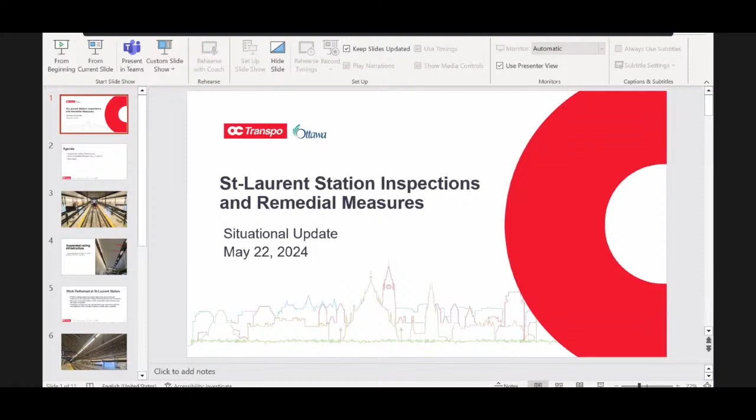I'm happy to share that Saint Laurent Station has fully reopened for customers as of the start of service this morning. Train Line 1 service started on time, running from Tunney's Pasture to Blair Station, serving every platform. I would like to thank our customers for their patience over the last few days with this inconvenience. As you will see in the presentation, this was complex work affecting a large area of the station that could not be rushed. I'm thankful to Tammy Rose for joining me today.

Her team has been working nonstop with our transit engineering team to get us to where we are today. I know many of you have questions about Saint Laurent station, and we have experts with us, in addition to Tammy and myself, to provide you with as much information as possible. This afternoon, we will cover what led us to temporarily close the train platforms at Saint Laurent station, the work that has been completed, and next steps. Next slide, please.

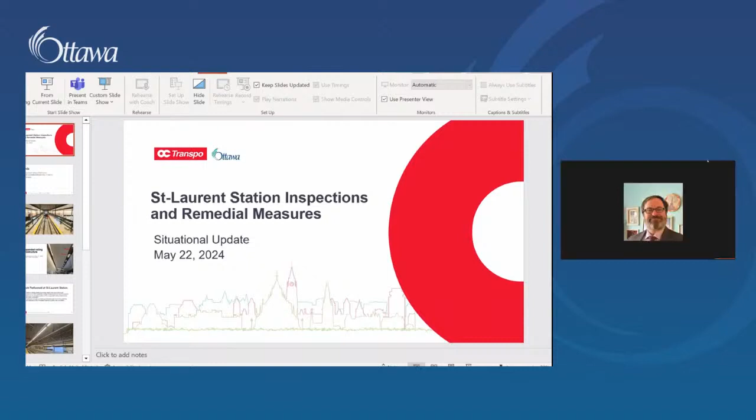René, excuse me, I don't want to interrupt you, but we're not in presentation mode. Is the media on the line? One second, Tammy, we'll get that fixed. Thank you, Tammy. I think we're good to continue, René. We're seeing the photo of Saint Laurent Station now.

Excellent, thank you very much. My apologies for that. So I will now speak to what led us to closing the train platforms.

Undertaking these daily inspections allows us to find and address potential issues before they become more serious or pose a safety risk. In this instance, while there was an impact to service at Saint Laurent Station, identifying this issue now has allowed us to quickly address it and work to put in place a long-term fix. Once this was discovered, out of an abundance of caution, we immediately took action and closed the train platforms to give crews the space to inspect the ceiling safely.

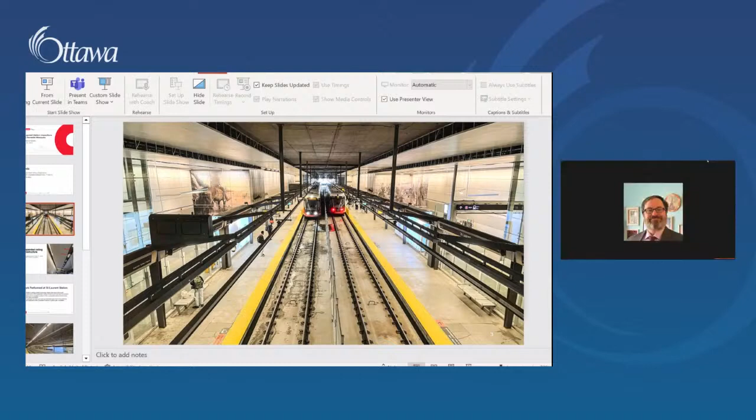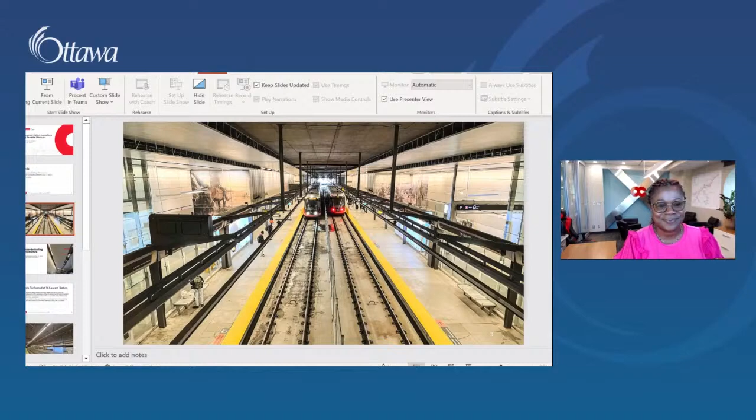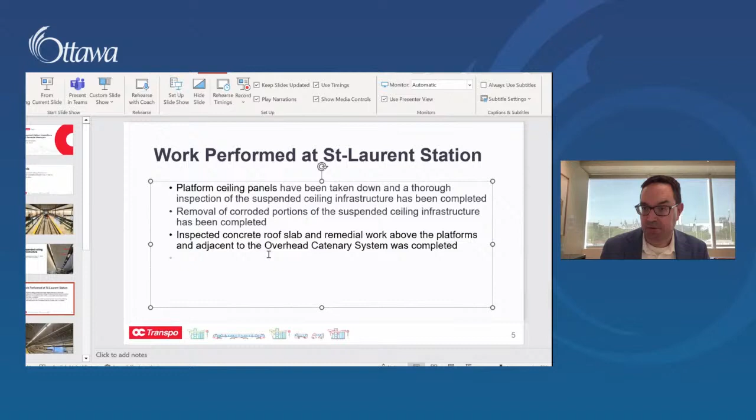René, I'm just going to pause you. I haven't seen the slides advanced. I'm not sure if anyone else has. I see a couple shaking heads. So we should be on slide 5 now, I believe. Chair, my apologies, the team is working on it, there's a small technical hiccup, if you give us just a second we'll have it fixed. Okay, we'll take a pause then for a few seconds. Thank you very much, because I don't see my slides. So we're on slide 5 now on the screen. Are we good to keep going? Yeah, I'm talking about slide 5 effectively. Okay, so maybe I can just say it again.

First, engineering teams removed some suspended ceiling tiles to do a preliminary inspection and make recommendations on next steps. It was then determined that to support a complete and detailed inspection, all suspended ceiling tiles on the platform area had to be removed. Once this was complete, workers removed corroded portions of the suspended ceiling structure and reinforced other sections.

This work posed an additional challenge as part of the area that needed to be worked on was adjacent to the overhead catenary system. This is why we needed to temporarily suspend Line 1 service late last evening and de-energize the system in that area. This provided us with the additional time required to complete the remaining work in areas close to the overhead catenary system and inspect the concrete roof slab, which allowed us to open for service this morning.

Once all work was complete, a final thorough inspection was done and sign-off was provided by the engineering teams. Next slide, please, we should be on slide 6.

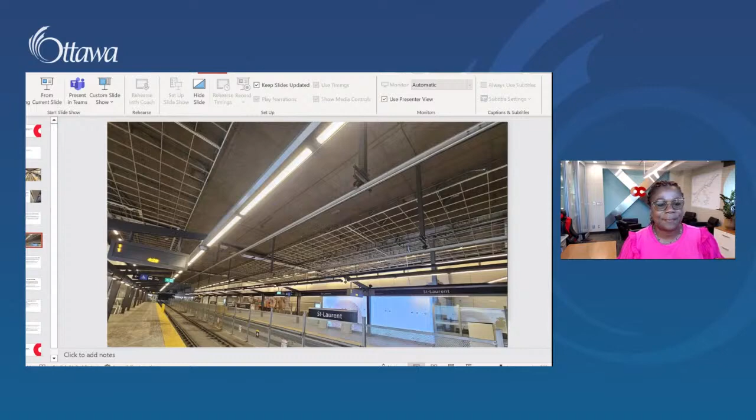Multiple engineering teams worked together, and the Infrastructure and Water Services Department provided engineering on the concrete roof slab. Then, Rideau Transit Maintenance provided their sign-off on the suspended ceiling infrastructure. Lastly, our transit engineer services confirmed that the station could reopen. After all of these validations were complete, the station was cleaned for customers and reopened this morning.

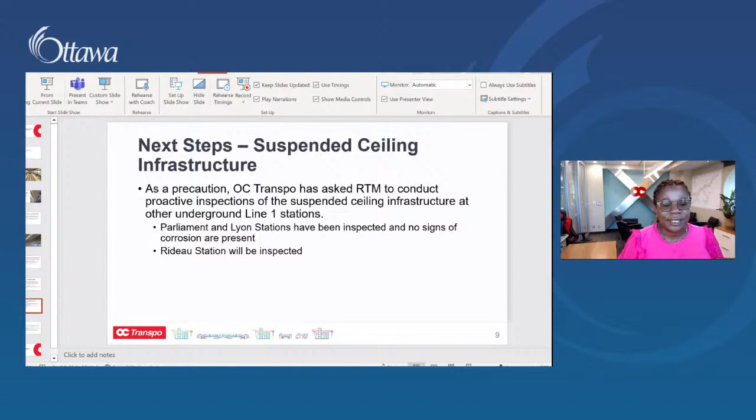We have provided a lot of information today, and I want to recap the important things to remember. The city has frequent, routine, and mandatory inspections of all municipal assets. RTM continues to undertake regular inspections of stations and rail infrastructure. The Infrastructure and Water Services Department has protocols in place for regular inspection of citywide assets, including the Saint Laurent Tunnel. Future inspections and our minor rehabilitation efforts in Saint Laurent Station will be coordinated to minimize impacts to customers.

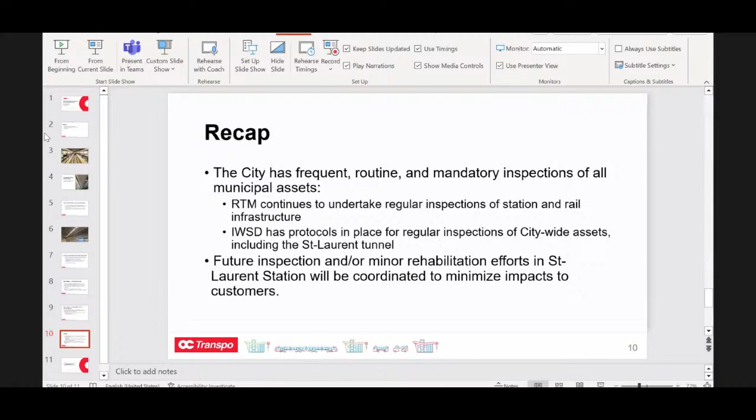This is some of the discoloration, which was the first indication. Maybe just, again, for people who are tuned in, can you explain what we're seeing here, what the arrows are indicating?

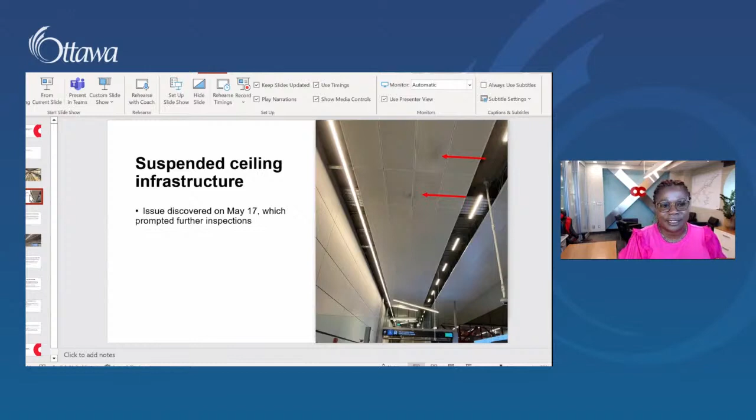Sure, Chair. So what we see here, it's a decoloration, which is abnormal. So that's why we asked for more investigation. Okay, thank you.